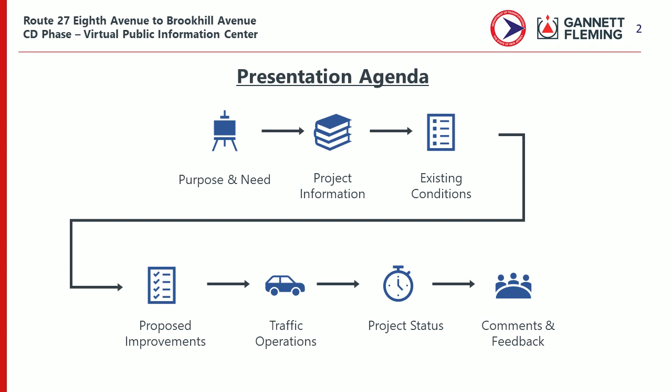In this presentation, we will provide the purpose and need which led to the development of the project, as well as the goals and objectives that the project attempts to accomplish. We will also provide information on the project's background and review existing conditions of the project corridor. The proposed preferred alternative will then be presented, and finally, we will review the status of the project and offer an opportunity for comments and feedback.

The New Jersey Department of Transportation Bureau of Traffic Engineering has identified that the Route 27 corridor needed improvements for the safety of pedestrians, bicyclists, and motorists. The safety management system ranks the area 9 out of 10, with 10 being the highest priority areas in need of safety improvements, and the 2015 bicycle segment ranking listed the area 41 out of 375, indicating high need for safety improvement. Key issues identified along the Route 27 corridor include safety, mobility, and accessibility for all roadway users. Congestion in the corridor, as well as environmental and right-of-way impacts, were also considered key issues.

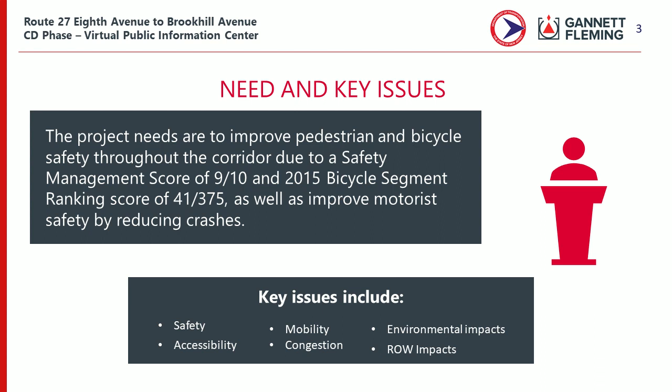The overall purpose of the Route 27 Roadway Safety Improvement Project is to increase safety for all roadway users by implementing on and off roadway improvements within the project area.

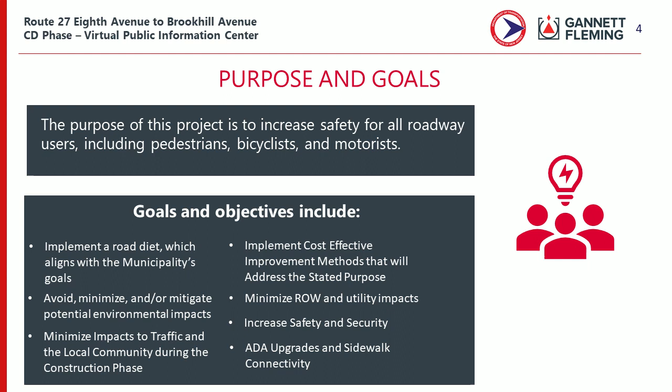The goals and objectives of this project include implementing a road diet, which aligns with the municipality's goals; avoiding, minimizing, and/or mitigating potential environmental impacts; minimizing impacts to traffic and the local community during construction; implementing cost-effective improvement methods that address the stated purpose; minimizing right-of-way and utility impacts; increasing safety and security; and ADA upgrades and sidewalk connectivity.

We will now review the project information.

The project area includes residential and commercial buildings as well as religious establishments. There are 2 signalized intersections, 15 unsignalized intersections, and numerous driveways along the Route 27 corridor within the project limits. The project area also includes bus and pedestrian facilities. However, many of the sidewalks and ramps are non-ADA compliant and in need of repair.

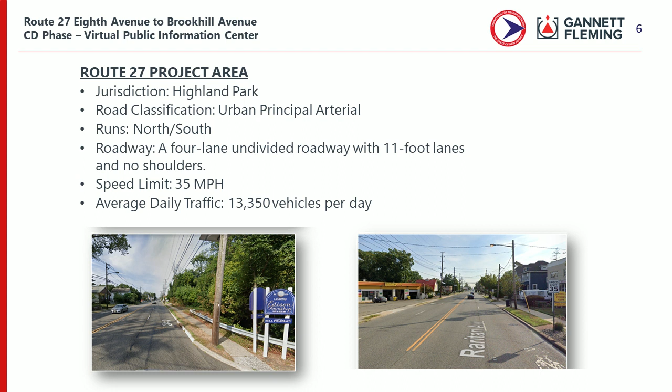Currently, there are shared lane markings in the right lanes of both directions for bicyclists to share with motorists. These right lanes are only 11 feet in width, which is narrower than the desirable lane width to accommodate shared use. There is one structure within the project limits, structure number 1217151, along a tributary to Millbrook, which is a twin-barrel reinforced concrete elliptical pipe culvert constructed in 1980.

The Route 27 corridor is an urban principal arterial roadway that runs north and south in Highland Park, Middlesex County. The posted speed limit is 35 miles per hour. This segment of Route 27 experiences approximately 13,350 vehicles per day.

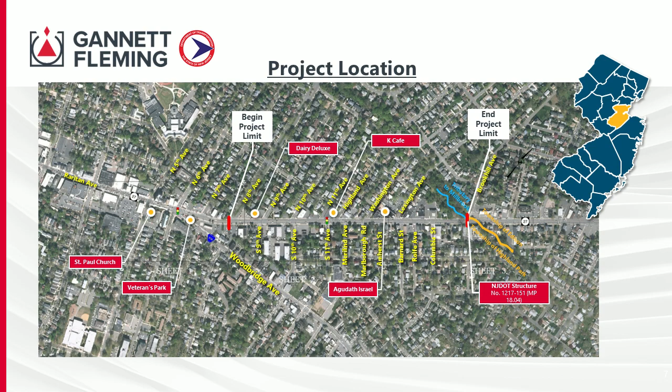We will now review the existing conditions.

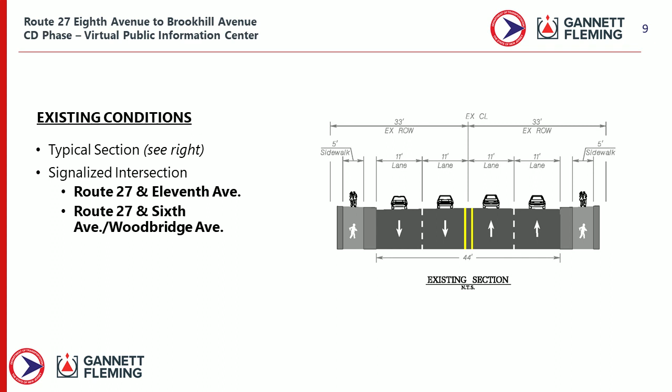Route 27 within the project area is a 4-lane typical section. The interior and exterior lane widths are 11 feet with no shoulder or divider and have inconsistent cross slope between 1 and 6%. 5-foot sidewalks are located on both sides of the roadway for a majority of the project. The signalized intersections within the project area are at Route 27 with 11th Avenue and Route 27 with 6th Avenue, Woodbridge Avenue.

Safety issues are a major concern for this corridor. Within the 3-year analysis time frame of 2015 to 2017, a total of 68 crashes occurred, including 2 fatalities and 1 bicyclist crash. Out of that 68, 38 of the crashes occurred at unsignalized intersections or between intersections, which can be seen in the large percentage of angle and left turn/U-turn crashes. Both categories are significantly higher than the 2017 statewide average.

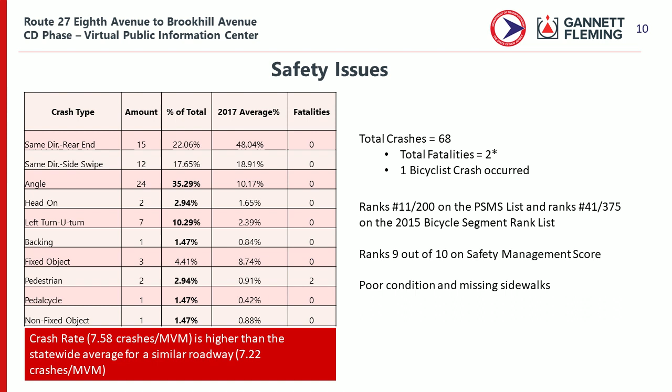There were 2 pedestrian crashes, which also ranked higher than the statewide average. The crash rate for this corridor is 7.58 crashes per million vehicle miles, which ranks higher than the statewide average for a similar roadway. Additional crashes are known to have occurred since this analysis period.

We will now review the proposed improvements. The proposed preferred alternative includes reducing the number of travel lanes from 4 to 2 and implements a bicycle lane with a buffer in each direction.

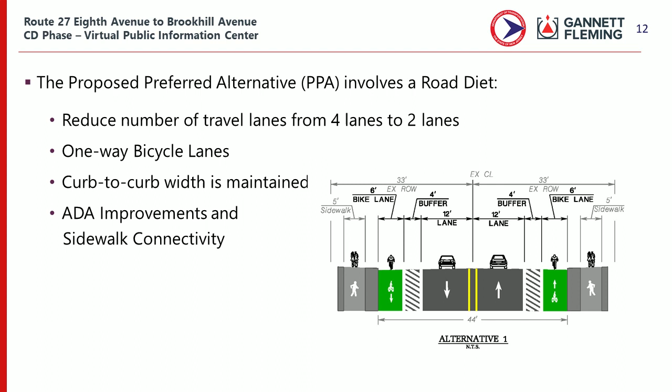The next few slides will show the proposed improvements throughout the corridor. We will highlight important features and those that differ from the typical section discussed on the last slide. On the southern limit of the project, the northbound approach of Route 27 is converted to 1 through lane and 1 right-turn-only lane, a revision to the existing condition.

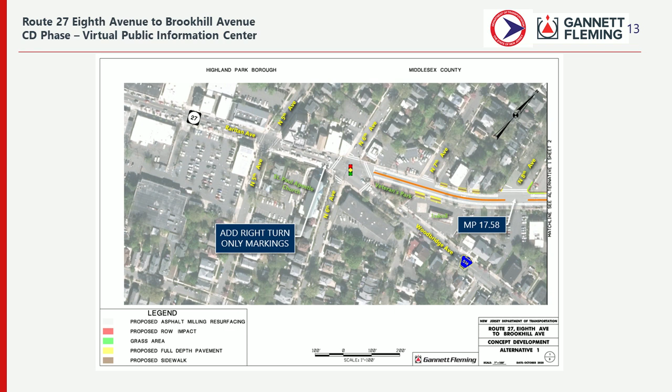The southbound approach of Route 27 adopts the preferred alternative cross-section. The remaining 3 legs of the 6th Avenue Woodbridge Avenue intersection maintain their existing lane configurations.

As we continue northbound through the corridor, the preferred proposed alternative typical section continues, depicting 1 lane as well as bicycle lanes and buffers in each direction. The traffic signal at 11th Avenue will be upgraded, including new traffic signal heads with retro-reflective backplates and pedestrian signal heads in conjunction with these improvements.

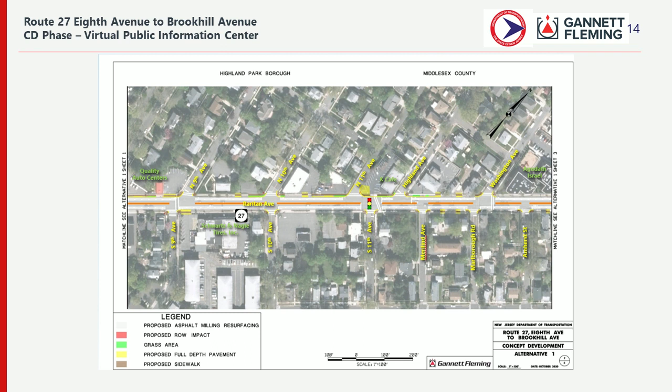In 2019, a new pedestrian signal was constructed at the northern leg of the intersection with Washington Avenue. The proposed improvements continue to the northern limits of the project, concluding at Brookhill Avenue, the approximate border between Highland Park and Edison Township. Past this intersection within Edison Township, the roadway returns to the existing geometry of 2 lanes in each direction.

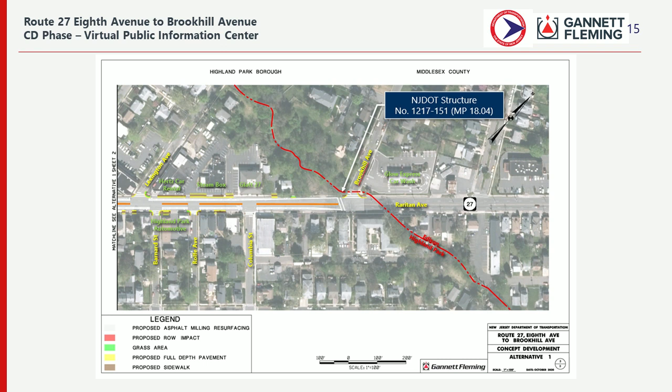We will now review the traffic operations and proposed traffic management during construction. Analysis was performed to compare the no-build alternative versus the proposed improvements. The no-build alternative utilizes traffic volumes projected to the year 2024 with no changes made to the existing project area.

These results are compared to the proposed improvements in order to determine how traffic operations are affected by reducing the number of lanes and incorporating the proposed improvements to the traffic signals. These results found that operations were maintained throughout the corridor.

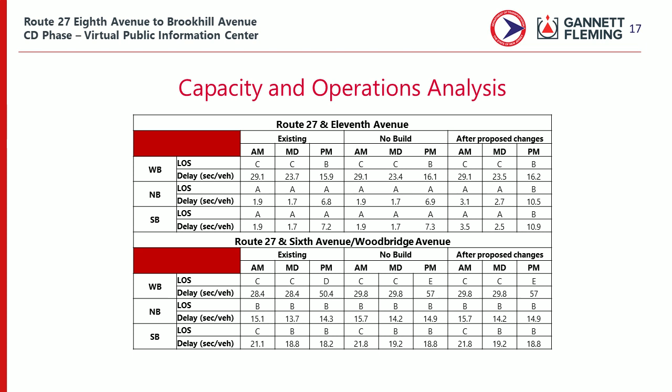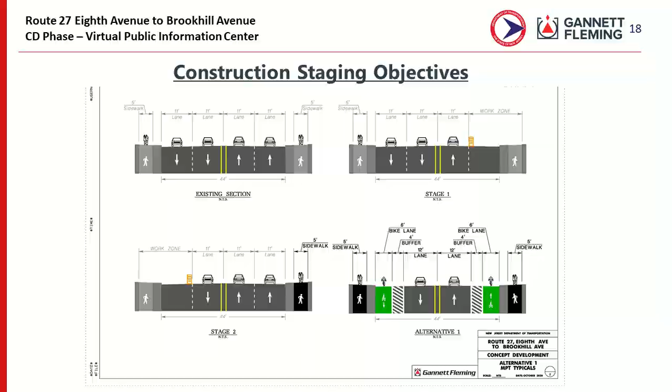In this phase, the project team is responsible for data collection, evaluating deficiencies and identifying fatal flaws, evaluating alternatives, coordinating with stakeholders, completing the environmental screening, assessing right-of-way and access impacts, determining the preliminary preferred alternative, identifying substandard design elements, determining applicable environmental documents, and preparing the construction cost estimate.

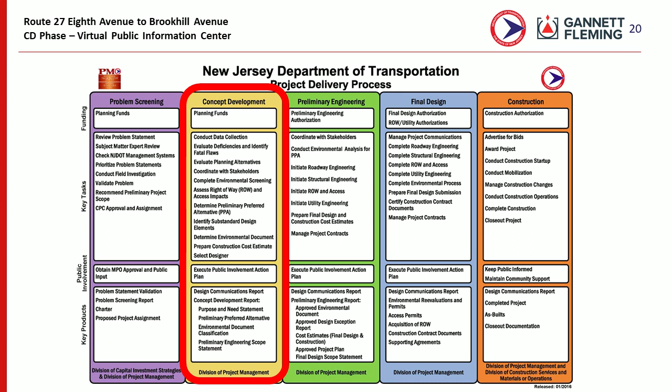Once concept development is complete, the project will advance to the preliminary engineering phase, where design will commence to begin the permit processes. After preliminary engineering, the project will move to the final design phase and then the construction phase.

We will now provide information on how to submit comments and feedback. Thank you for taking the time to view this presentation on the concept development phase for the Route 27 8th Avenue to Brookhill Avenue Roadway Safety Improvement Project.

Next steps include the 14-day public comment period where the New Jersey Department of Transportation welcomes input from the public. Then the concept development report will be prepared with all documentation to finalize this phase of the project.

Please submit questions or comments through October the 16th, 2023 using the form on the website. After October the 16th, 2023, you can contact Meredith Hammond by email at meredith.hammond@dot.nj.gov or by phone at area code 609-963-1982. Your participation and comments are appreciated by the New Jersey Department of Transportation. Thank you.